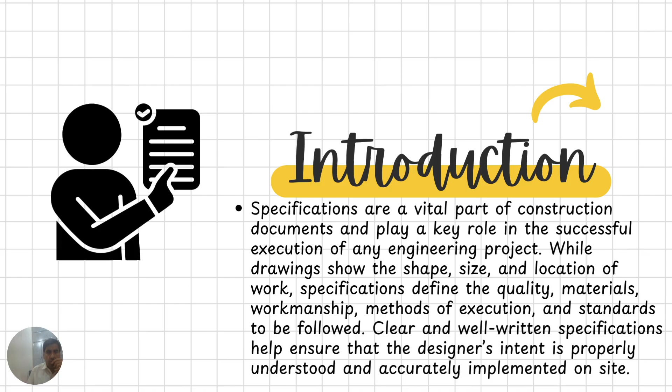The principle of writing specification focuses on clarity, completeness, accuracy, and consistency. Specifications must be simple, precise, and free from ambiguity so that a contractor, engineer, and supervisors can easily interpret and follow them. They should clearly state the type and quality of material, relevant codes, standards, testing requirements, and the method of measurement.

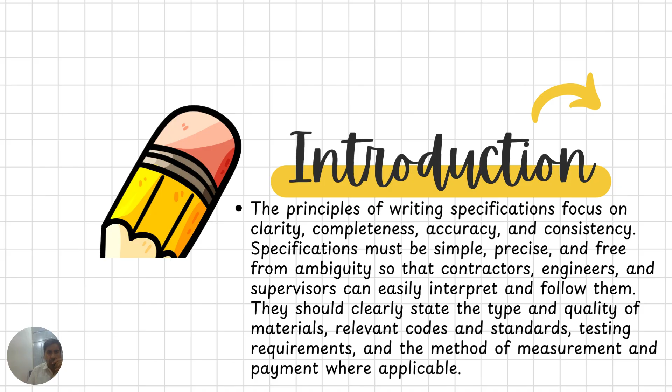Good specification reduces disputes, controls quality, improves coordination between parties, and ensures compliance with design and safety requirements. Therefore, understanding the principle of writing specification is essential to achieve effective communication, proper construction practices, and a successful project.

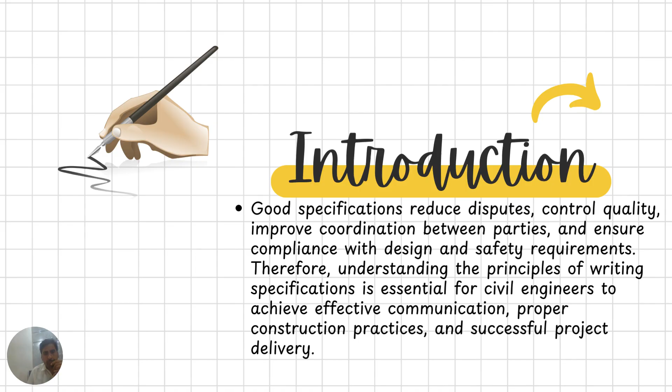Description of material: Material specification clearly defines the type, quality, composition, and standard of material to be used in the project. This section ensures that all materials supplied and used in construction meet the required performance and durability criteria identified by the designer.

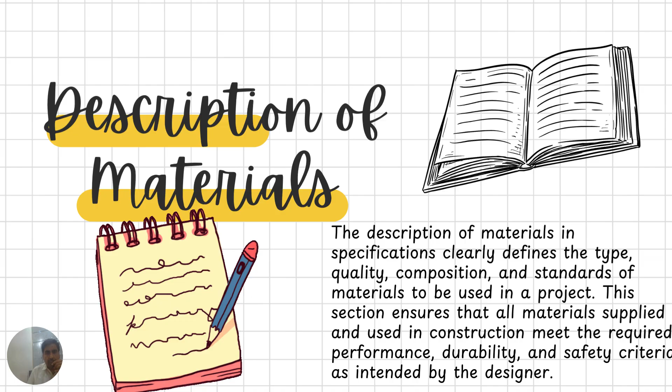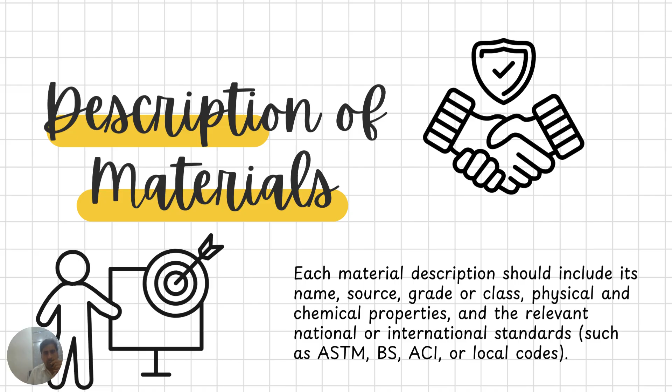This material description shows the source, grade or class, physical and chemical properties, and relevant national or international standards such as ASTM, ACI, where applicable. Requirements for testing, handling, storage, and acceptance should also be specified to maintain quality.

Clear and detailed material description helps avoid the use of substandard or unauthorized material, reduces misunderstanding between stakeholders, and ensures uniformity in construction. Properly written material description contributes to the overall quality, strength, and longevity of the structure.

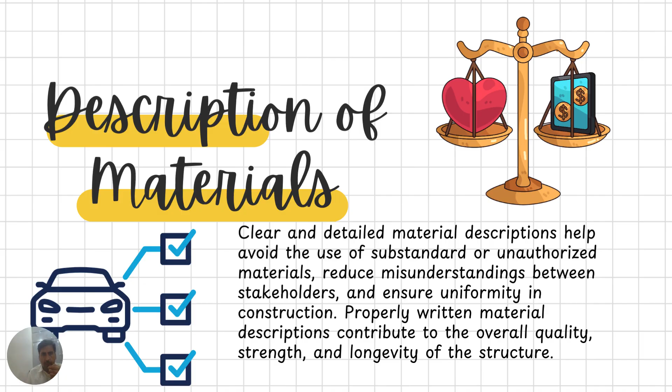Workmanship: Workmanship refers to the quality and standard of skill, care, and execution applied in carrying out construction work. In specification, workmanship requirements define how materials are to be handled, installed, finished, and protected to achieve the desired quality and performance of the structure.

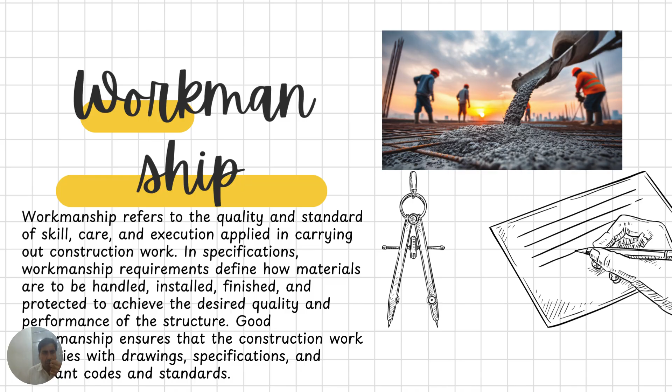Good workmanship ensures that the construction work complies with drawings, specifications and relevant codes and standards. The specification of workmanship should clearly state the method of construction, level of skill, requirement, tolerance, surface finishing, alignment, and all special procedures to be followed during execution.

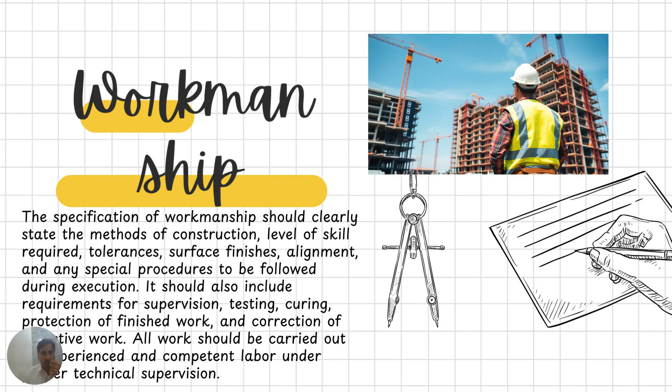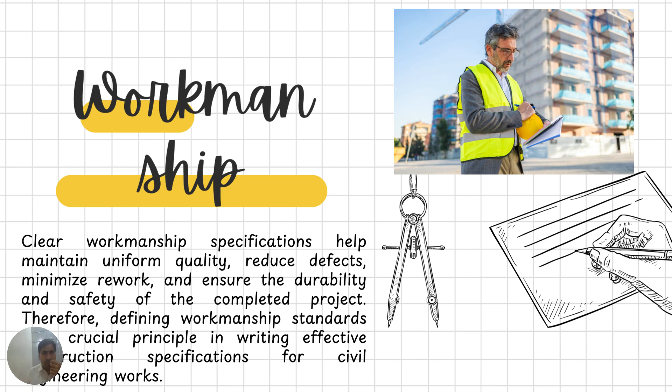It should also include requirements for supervision, testing, curing, protection of finished work, and correction of defective work. All work should be carried out by experienced and competent labor under proper technical supervision. Clear workmanship specification helps maintain uniform quality, reduce defects, minimize rework, and ensure the durability and safety of the completed project. Therefore, defining workmanship standards is a crucial principle in writing effective construction specifications for civil engineering works.

Tools and plants: This refers to all equipment, machinery, and appliances required for the proper execution and completion of construction work. This section of specification defines the condition and performance requirement for tools and plants to be used in the project. Adequate and suitable equipment ensures efficiency, safety, quality, and timely completion of the project.

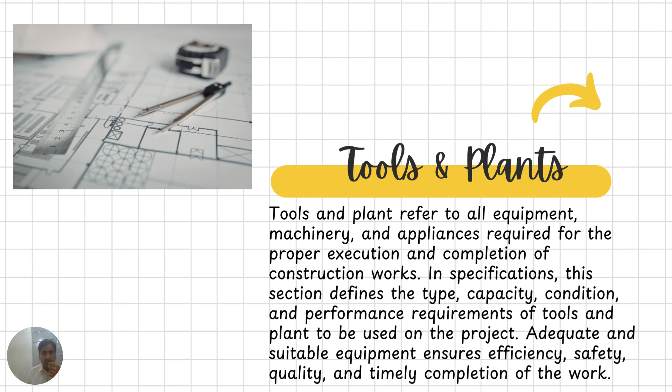The specification should state that all tools and plants used on site must be in good working condition and capable of creating the required standards. Necessary equipment such as mixer, vibrator, compactor, crane, or testing equipment should be mentioned along with their minimum capacity or performance criteria.

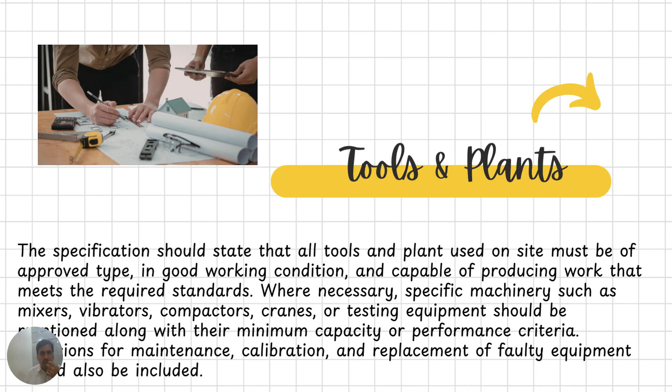Provision for maintenance, calibration, and replacement of faulty equipment should also be included. Proper specification of tools and plants helps achieve consistent workmanship, reduce construction delays, ensure safety compliance, and maintain the overall quality of the project. Therefore, defining clear equipment or tools and plants is an important element in writing effective construction specification.

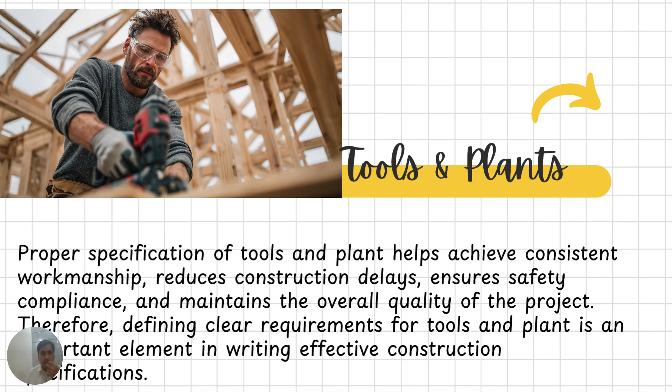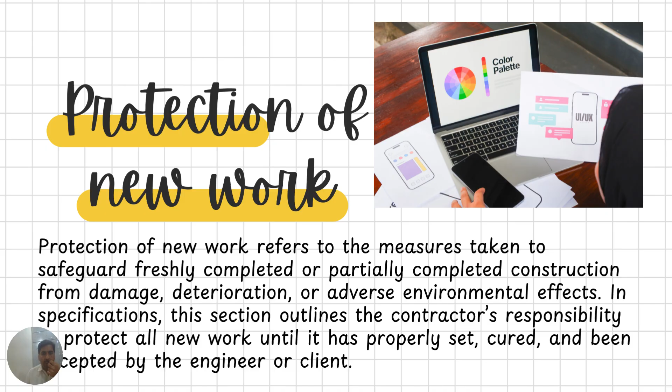Protection of new work refers to safeguarding freshly completed or partially completed construction from damage, deterioration, or adverse environmental effect. In specification, this section outlines the contractor's responsibility to protect new work until it has been properly set, cured and accepted by the engineer or client.

Proper protection of the work ensures durability, maintains quality, prevents defects, and avoids costly repair or rework. Clearly stated requirements for the protection of new work are an essential principle in writing construction specification for civil engineering projects. Expression: Expression in specification refers to the manner in which requirements are written and communicated.

It emphasizes the use of clear and unambiguous language so that the intent of the engineer or designer is easily understood by all parties involved in the project. Proper expression ensures that specifications are interpreted correctly and executed without confusion or misinterpretation.

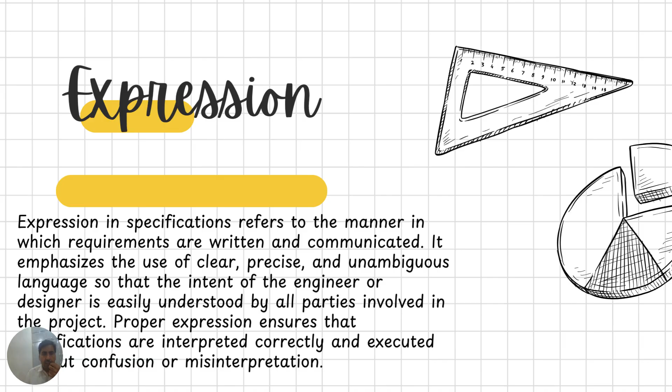The language used in specification should be simple, direct, and consistent. Technical terms should be used correctly. Unnecessary parts should be avoided, and instructions should be stated clearly and positively.

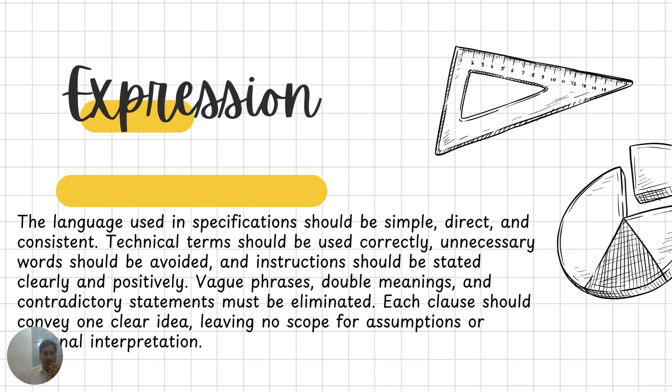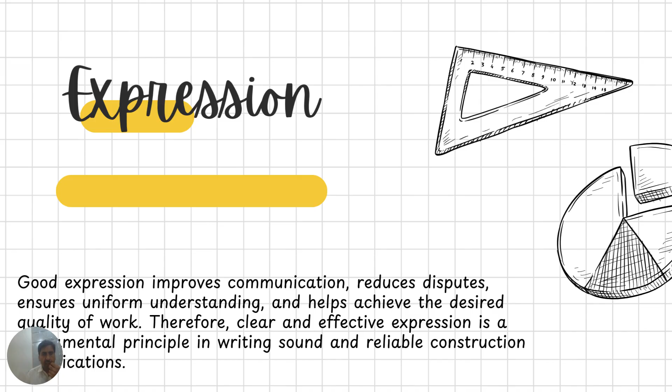Vague phrases, double meanings, and contradictory statements must be eliminated. Each clause should convey one clear idea with no scope for assumption or personal interpretation. Good expression improves communication, reduces disputes, ensures uniform understanding, and helps achieve the desired quality of work. Therefore, clear and effective expression is a fundamental principle in writing sound and reliable construction specification.

Clauses of specification: Clauses are individual sections that clearly define the requirements of a construction project. Each clause deals with a specific aspect of the work, and together they form a complete and systematic description of how the project is to be executed in accordance with the design intent.

A typical specification consists of the following main clauses. First is the general description of work. This clause defines the nature and scope of the work, including location, extent, and general conditions under which the work is to be carried out.

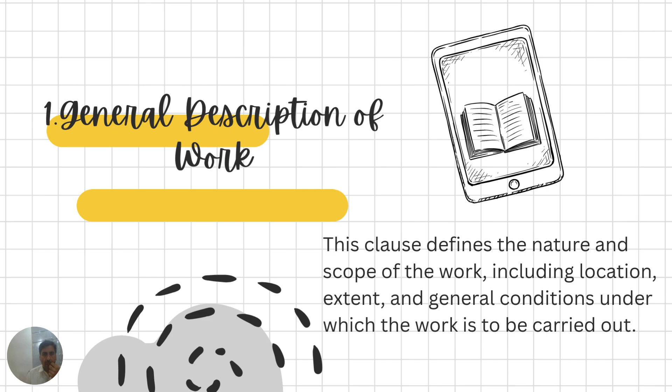Second is the description of material, which specifies the type, quality, grade, standard, and source of material to be used in the work. Third is workmanship. This clause describes the method of execution, skill required, quality of finish, tolerances, and compliance with drawings and standards.

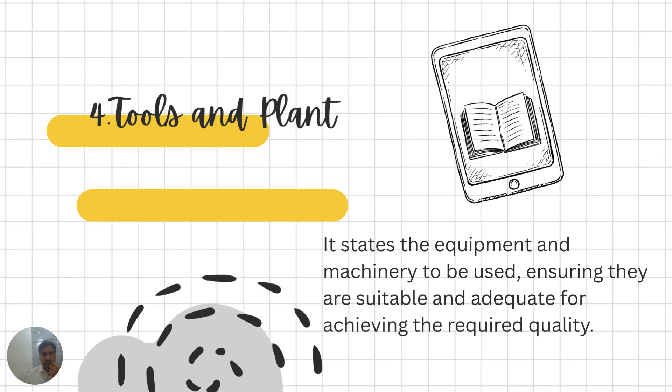Fourth is tools and plant, which include the equipment and machinery to be used, ensuring they are suitable and adequate for achieving the required quality. Fifth is protection of work. This clause defines the measures for protecting new and finished work from damage, weather effects, and deterioration until completion and acceptance.

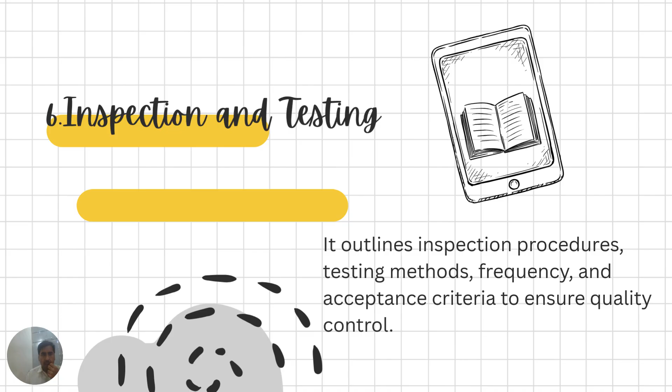Sixth is inspection and testing, which outlines inspection procedures, testing methods, frequency, and acceptance criteria to ensure quality control. Seventh is mode of measurement and payment. This clause explains how the work will be measured and the basis on which payment will be made.

Conclusion: Well-constructed clauses make specification clear, complete, and easy to understand. Properly written clauses help avoid disputes, ensure quality construction, and contribute to the successful completion of the civil engineering project.